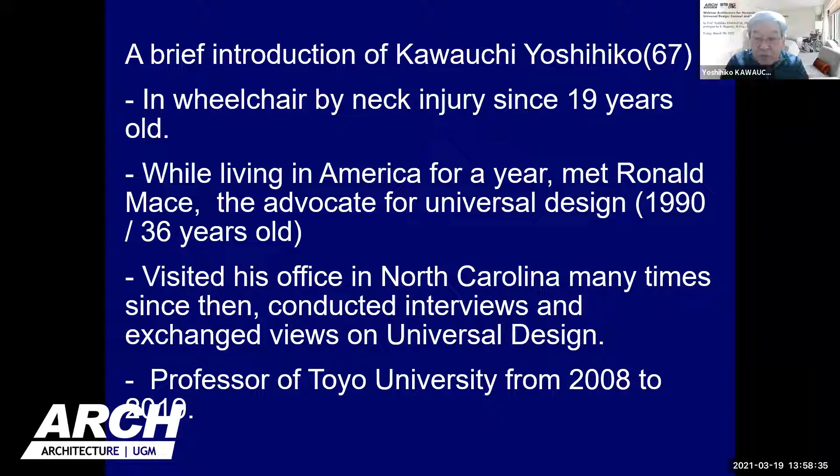And since I'm using a wheelchair, accessibility is very important. But I'd like to ask you why accessibility is important. Let me talk about the stairs. Stairs are not accessible for wheelchair, but if there were no stairs in the buildings, people would have no access to upstairs. That means stairs can divide people into two groups: one is people who can go upstairs, and the other is people who cannot go upstairs.

In that sense, stairs are set to generate discrimination among people. Then next question: everybody says discrimination is bad, but why is discrimination unacceptable?

Because it harms dignity as a human. Accessibility is very important to respect dignity and create an equal society for all. So as a short conclusion, I would like to say accessibility is for dignity. When you design something, please do not forget accessibility is for dignity.

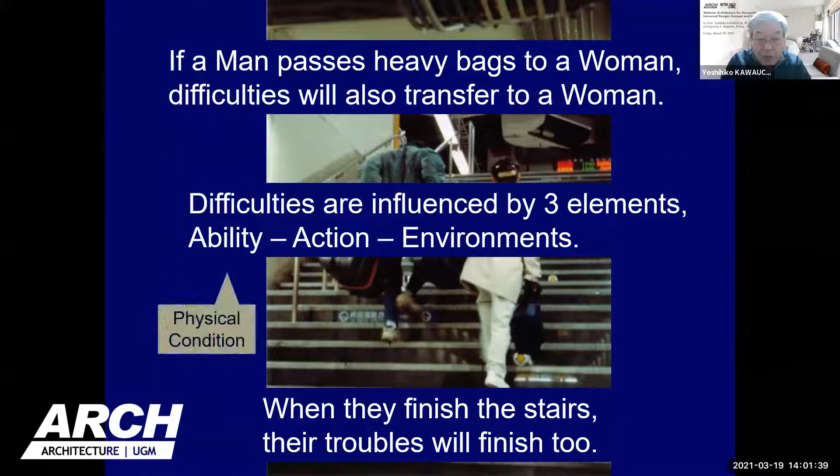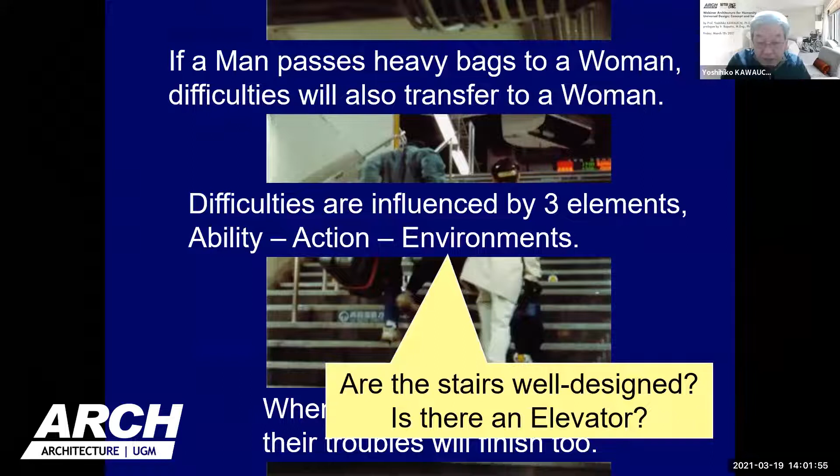So difficulties are influenced by three elements. One is ability: whether or not that person is muscular. Two is action: whether or not they are carrying heavy bags or lightweight bags. Then environment: are the stairs well designed? Is there an elevator?

As a designer, I don't want to say that you shouldn't use this, or that you're not allowed to do that. Therefore, what we can do among the three elements is only one thing: change environments.

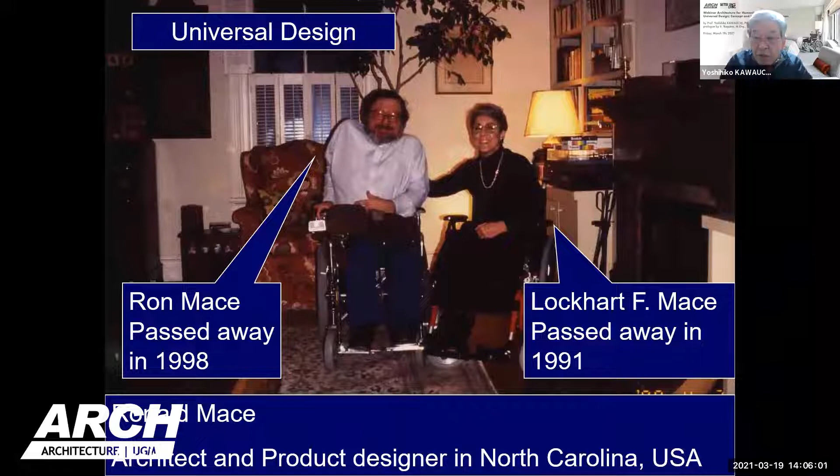This photo was taken in 1990, so at that time I think Lockhart already had cancer in her body. This is a photo from when I first met Ron.

Please watch this transparent tube. Because of the polio, his lung function was very low, so he always needed oxygen. He needed oxygen at any time, so he is pulling a very long, transparent tube. But at that time, he was still able to drive a car.

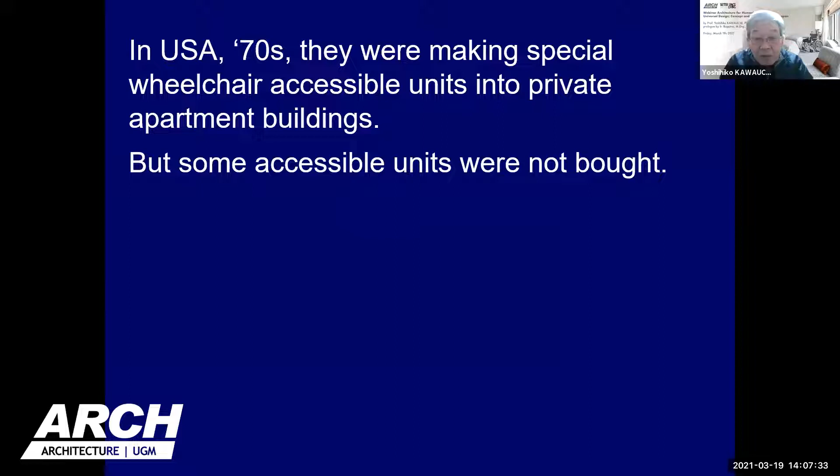In the USA in the 70s, they were making special wheelchair accessible units in private apartment buildings. But some accessible units were not bought. The owners tried to rent them to people who were not using wheelchairs, but they were not popular. People complained that there were no kitchen cabinets.

This was because the owners had removed the kitchen cabinets for the knee space of wheelchairs, and installed grab bars, but other people who have no disability complained it was an obstacle. The apartment owners started to complain: why do we, who have good wills and try to support people with disabilities, need to lose money?

Mace thought that this was because they made special accessible units only for wheelchair users. Many people, including babies and elderly people, are living in apartments together. So he thought it may be possible to design units easy to be used not only by wheelchair users, but also by everybody. He named this idea universal design.

It was mid-70s. And in 1985, he wrote the first article about universal design in the magazine named Designers West. This is a definition of universal design: Universal design is the design of products and environments to be usable by all people, to the greatest extent possible, without the need for adaptation or specialized design.

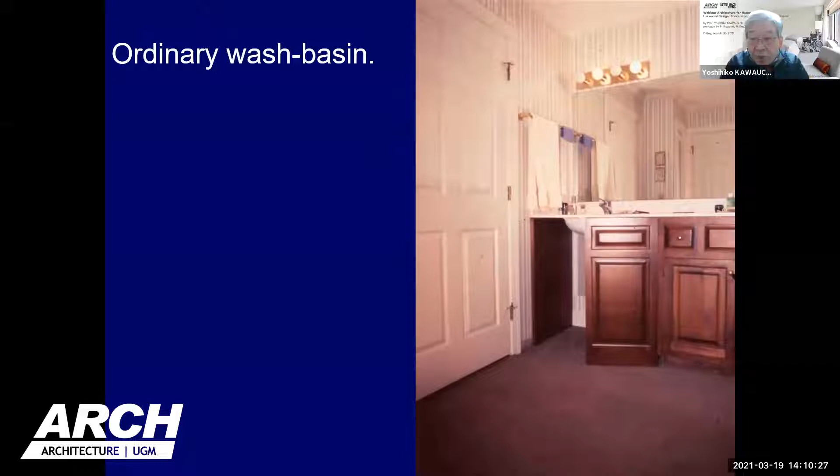This is a wash basin. Some people want to use it in a chair. At that time, if they can open the door of the cabinet, it must be very easy to create a knee space. However, if the door opens widely outside, it disturbs smooth movement of people. So it would be more convenient if the door could be stored.

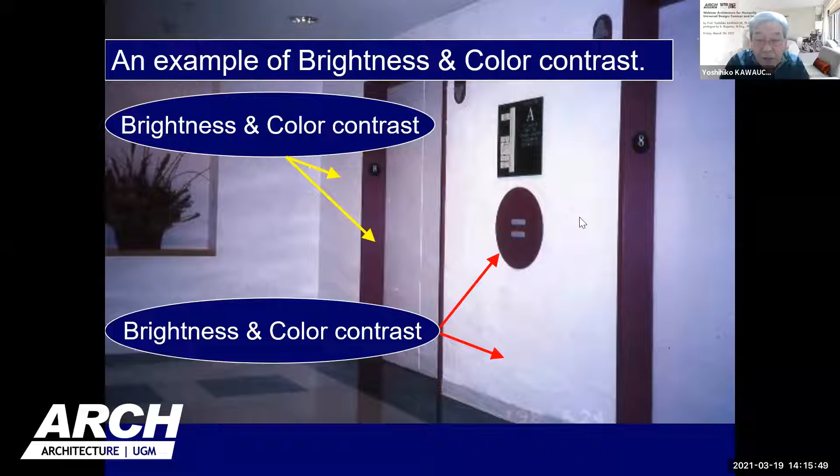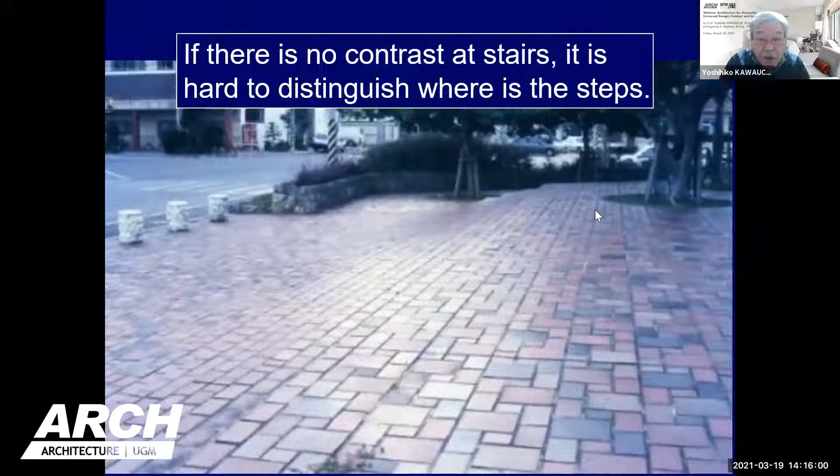This is a photo of the park. Because they made no contrast, it's hard to distinguish where the steps are.

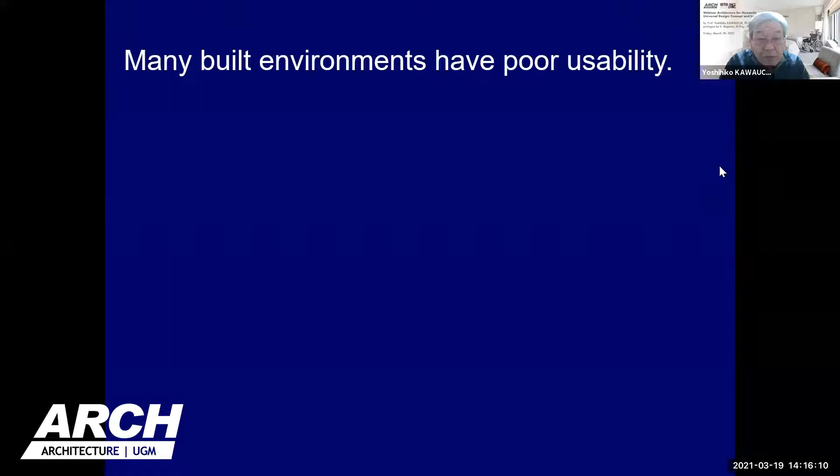Many built environments have poor usability, and unfortunately, many professionals and designers don't know it, so they repeat the same mistakes. We may be able to create a wonderful design if the knowledge and skills of professionals and the experience and wisdom of users are put together.

So therefore, universal design emphasizes user participation. It's not just a matter of people with disabilities having difficulties in the built environment. It will be effective to utilize the experience of various people into design.

Universal design is designed for all, but we need to remember that it is not one design for all. Sometimes it's hard to satisfy various needs with one solution. There is no ultimate one pen in a stationery store.

If you go to a stationery store, you can find various pens displayed on the shelf, and we users can choose one out of various pens in accordance with our needs. So choice is important. How can we provide various appropriate choices to users is critical. After getting choices, users themselves can choose the best one.

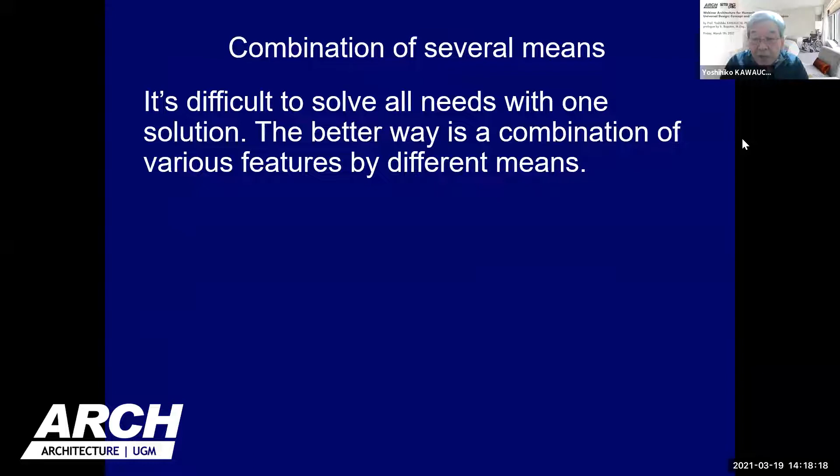When they provide choices to users, the most important thing is that it can be seen at a glance. In order to tell users that you have various choices, those choices should be displayed at a glance.

There is a criticism against universal design: 'for all' is just a dream, it is impossible. Yes, it is true.

For example, some products put into the market at the beginning have low user satisfaction. So the product starts to be improved, and then the satisfaction ratio gets better and better.

However, as users gain various experience, their needs become more severe, so the goal goes higher and higher. So the quality of design gets better and better, getting very close to the goal, but it will never reach the goal. It will never be 100% satisfaction. However, getting close is very important.

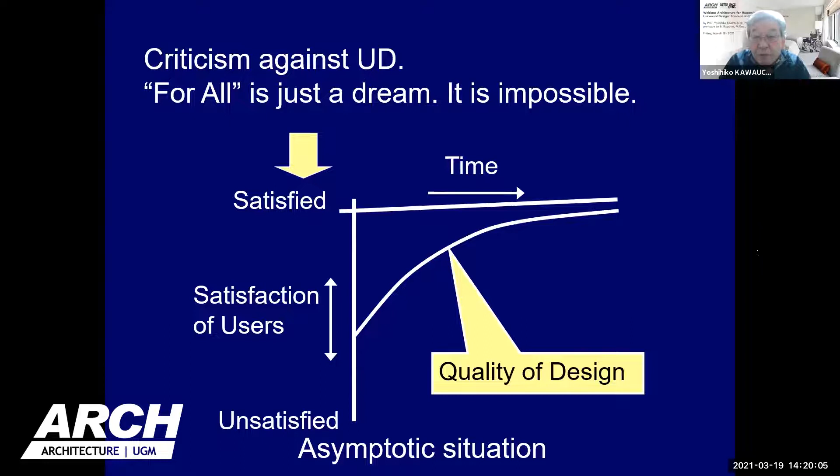So therefore, Ron Mace put a very important phrase into his definition: 'to the greatest extent possible.' Ron knew that 100% is impossible.

However, making the effort to the greatest extent possible is very important. By the way, this photo was taken only one week before his death.

Just one week before his death, we had an international conference in Long Island, New York, and at that time he had no trouble. But one week after, he had passed away.

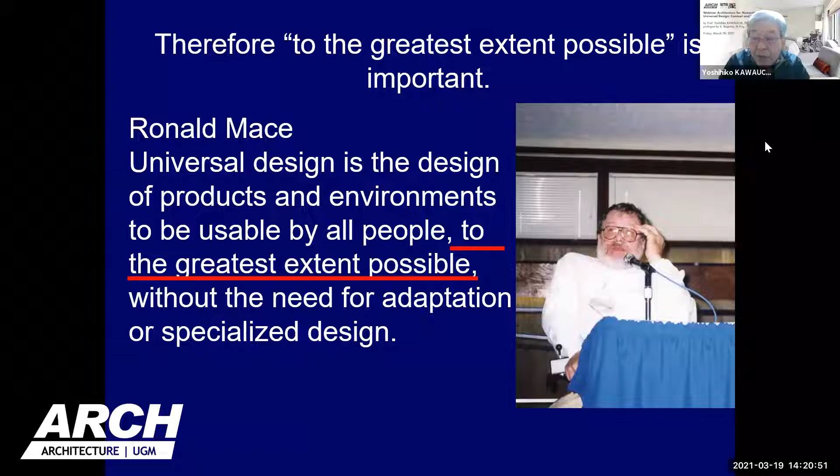In order to reach the goal of being usable by all people to the greatest extent possible, we believe that the spiral up is important.

Spiral up is a concept developed in Japan through continuous improvement. For example, there is some project where various people gather and start to discuss the purpose or goal of this project. Then they will do it.

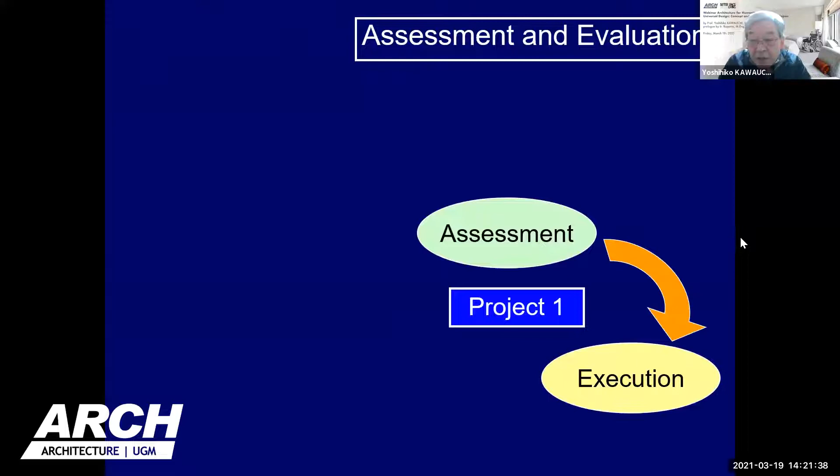Usually, for example, if construction is finished, the project will be finished. However, the important thing about spiral up is post-occupancy evaluation. Then, if they find a problem, they need to improve it.

This circle will happen in project 1. However, after finishing project 1, they will start project 2.

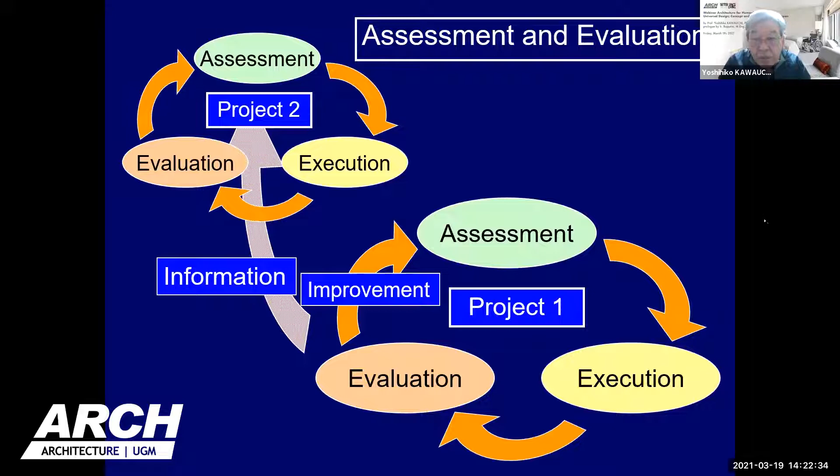At that time, if they can transmit the information of project 1 to project 2, project 2 must be better than project 1. If we can continue those efforts, the design quality of the entire society will be gradually improved.

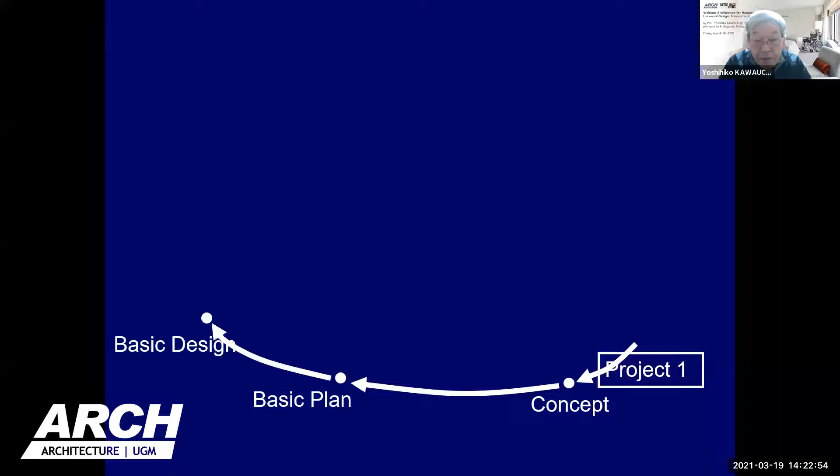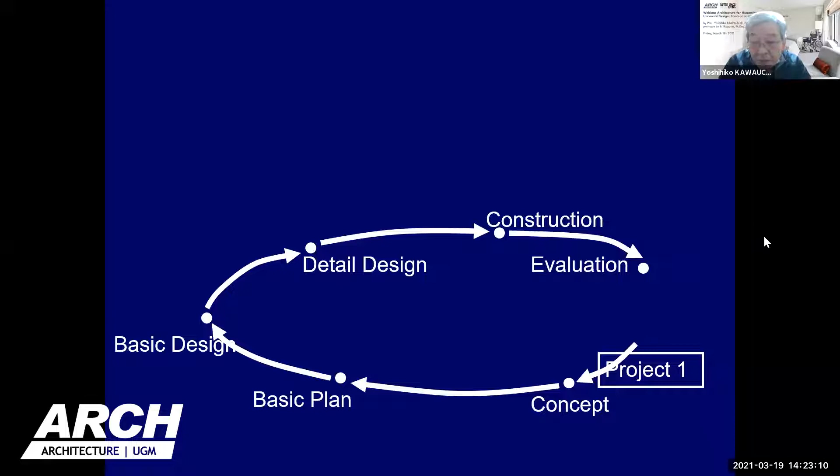Another drawing: project 1. We will start the concept design, then do construction. After that, we need to do a post-occupancy evaluation, and the information we got from this evaluation process should be put into project 2. Then project 2 does the same procedure.

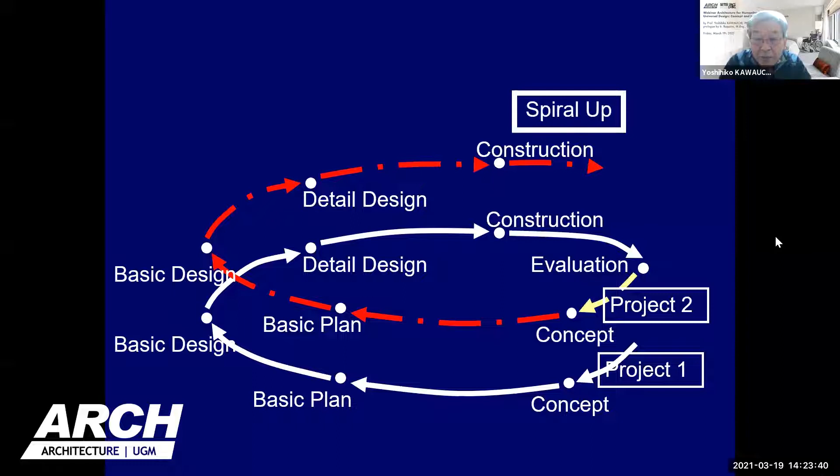Then after finishing project 2, the information gained in project 2 should be put into project 3. If we continue this kind of effort, project 2 will be better than project 1, and project 3 will be better than project 2. This kind of change is called spiral up, and it will make endless and continuous improvement.

I was planning to take a break, but I can continue. Please allow me to continue.

So let me start about the challenges of universal design in Japan. In Japan, the role of government in advancing universal design is very important. Aging is the most serious issue in Japan. They made laws and ordinances regarding universal design, especially the Tokyo 2020 Olympic and Paralympic Games, which have pushed universal design forward.

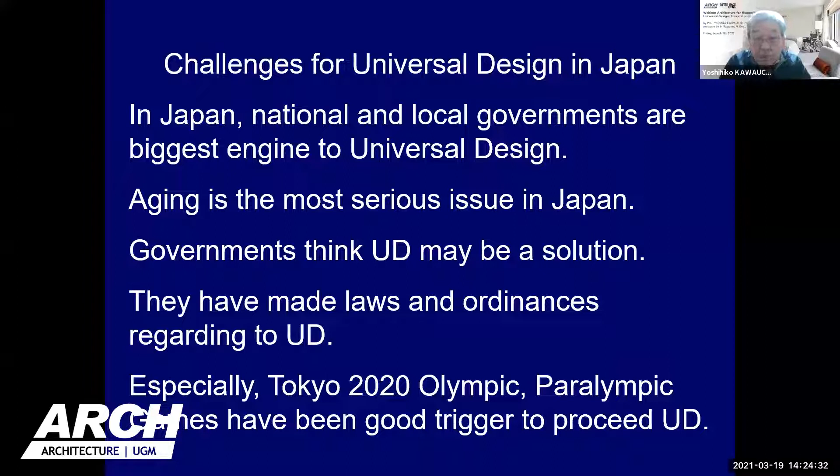Today, I want to explain some examples of airports whose attempts are internationally acclaimed. Skytrax evaluates airports, and this is a list of their evaluations. Skytrax evaluation has very many categories.

This is the World Airport Award, in the PRM and accessible facilities category. PRM stands for passenger with reduced mobility.

The first place is Tokyo Haneda. Second place is Kansai Osaka. Third place is Tokyo Narita. Fourth is Singapore Changi. Next is Incheon Seoul, and sixth place is Centrair Nagoya. Seventh is Hong Kong, eighth is Taiwan, then ninth is Fukuoka. So five airports out of ten international airports are Japanese. That means airport accessibility in Japan is very highly evaluated.

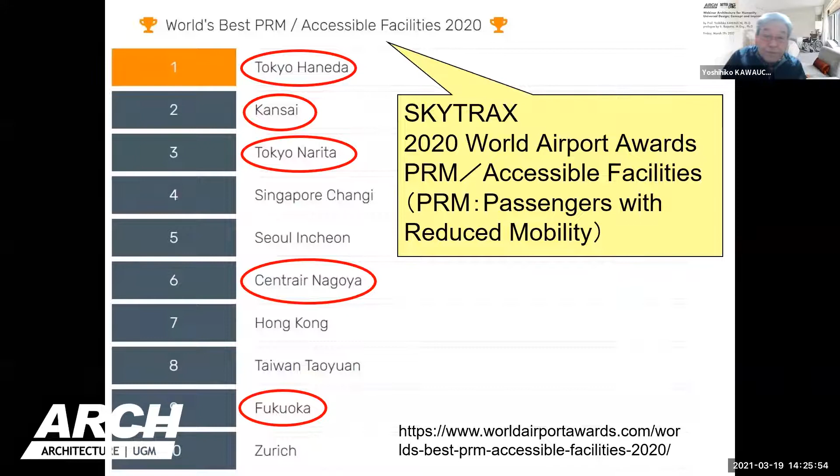But I have a slight complaint about this ranking, because we made Sapporo Airport based on the universal design concept, but it is not included in this list.

However, Tokyo Haneda is also awarded World's Cleanest Airport. Kansai in Osaka is awarded World's Best Airport Staff. And Centrair Nagoya is awarded World's Best Regional Airport.

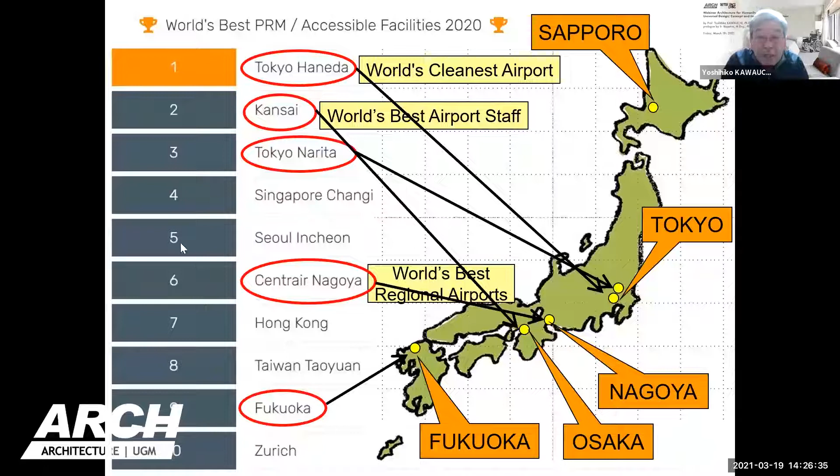The first challenge of airport universal design started at Centrair in Nagoya. Nagoya had an international expo in 2005, so they built a new airport based on the concept of universal design. A very interesting thing is that a non-profit organization by people with disabilities, named AJU, participated in this project as a professional universal design consultant.

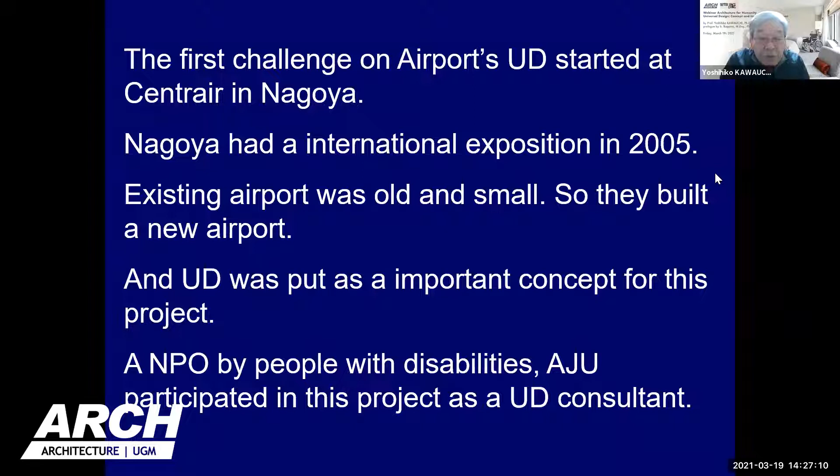In June 2000, AJU formed a universal design study group, and then set up 10 subcommittees for each issue, from 2002 to the opening of the airport in 2005. So these 10 subcommittees worked for 3 years.

These subcommittees had many meetings with users, designers, businesses, and parts manufacturers. They discussed and made mock-ups. These subcommittees had 106 meetings in 3 years.

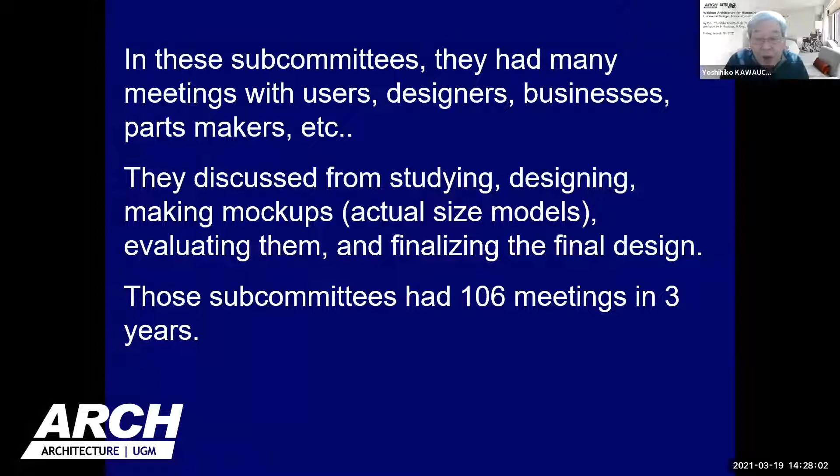This is a plan of the airport. The interesting feature is the so-called access plaza. All passengers come to this airport by train, car, ferry, and of course airplane, gather at this access plaza, and then go to wherever they want. The red arrow is the circulation of people. The left half is international, and the right half is domestic. A very simple plan creates simple circulation.

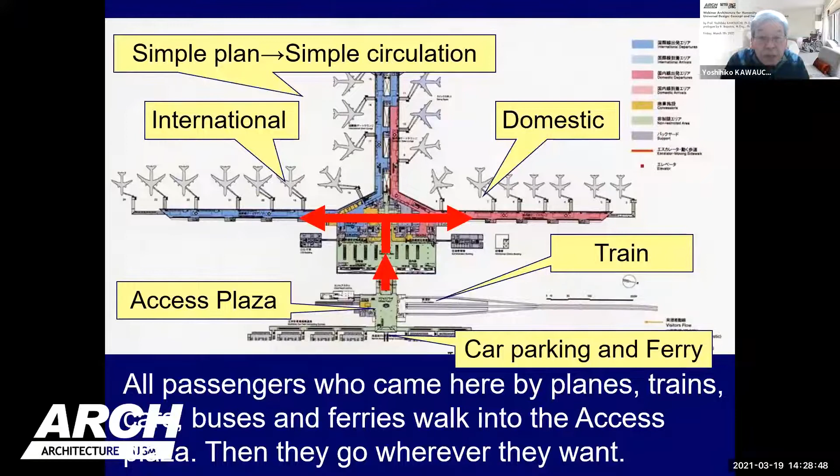The most interesting feature of this airport is the restroom. This is an airport, so many passengers are pushing big baggage and having trouble in small cubicles. Many various things are packed in the bag, so they wanted to carry their bag into the cubicle, but the cubicle is very small, so it's impossible. Therefore, we decided to make each cubicle bigger, and that is also available for users of small wheelchairs or people with baby strollers.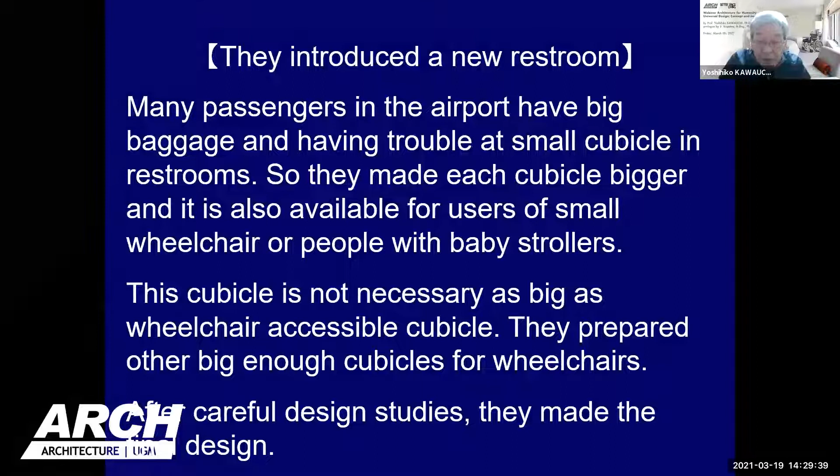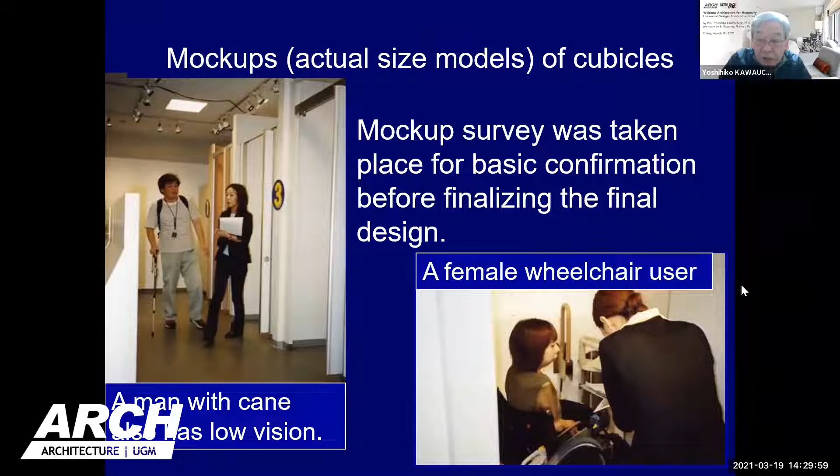We made a mock-up and checked it. We invited various people and heard their needs, and decided the detail of the design. It looks like a real toilet, but this is also a mock-up, just a model. We invited various people and asked them to check it. This is a drawing used for the mock-up.

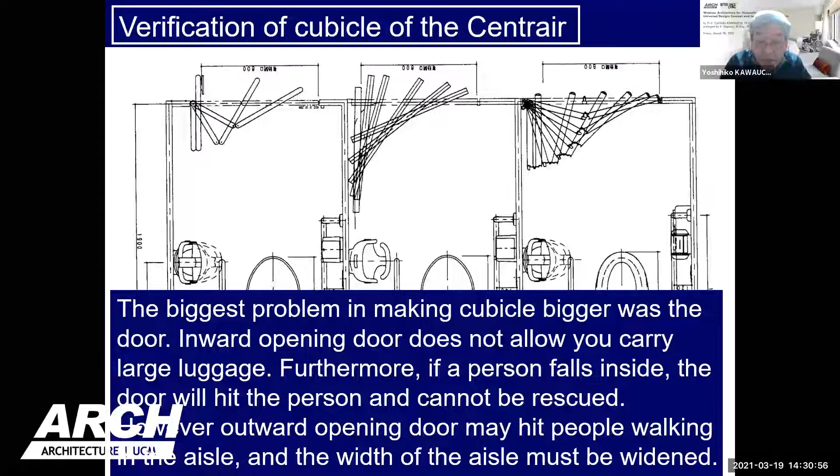We were very anxious about the door, because if the door opens inward, it does not allow you to carry large baggage. Furthermore, if a person falls inside, the door will hit the person and they cannot be rescued. However, if the door opens outside, it will hit people walking outside, and we would need to widen the width of the door or the aisle. So we considered folding doors and other specially devised ones that open outside but do not protrude too much on the aisle side. Therefore, we thought of a folding door or special function door.

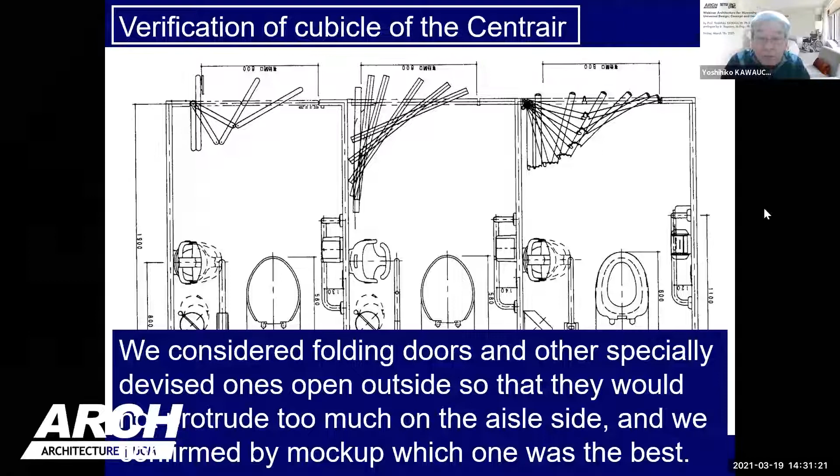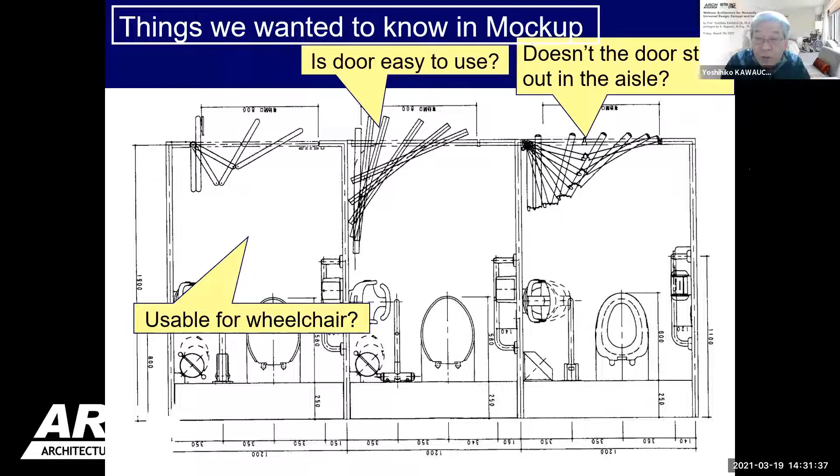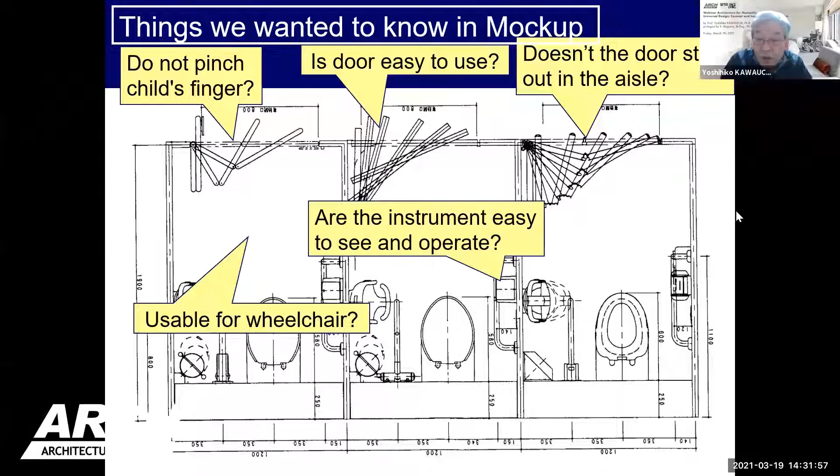So we wanted to know whether or not the space is usable for a wheelchair, whether this new door is easy to use, and whether this door does not stick out in the aisle. And because this is a folding door, we were very anxious about whether this door could pinch a child's finger. Also, our biggest concern was whether visually impaired people know the position of the key.

People with visual impairment often act on the basis of their experience. The key to the toilet door is usually near the edge of the door, on the striking side, so they look for it there, expecting it should be there. However, in many folding doors, the key is at the center of the door, so they cannot find it if they pay attention to the edge.

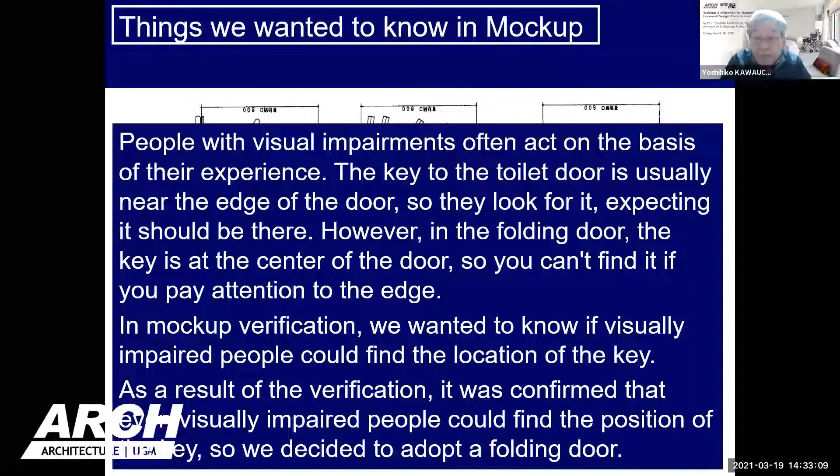In the mock-up verification, we wanted to know if visually impaired people could find the location of the key. As a result of the verification, it was confirmed that even visually impaired people could find the position of the key, so we decided to adopt a folding door. Then we installed an L-shaped handrail on the wall side, and on the other side we installed a flip-up handrail.

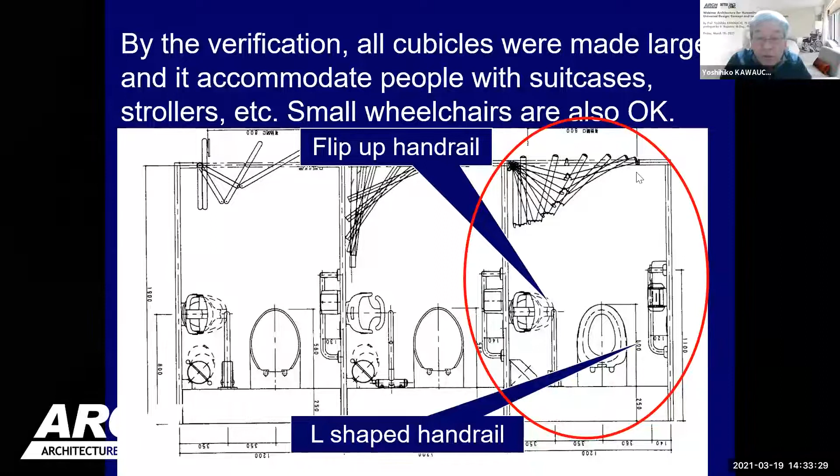Because this is a folding door, it can accept people with big suitcases, strollers, baby strollers, and of course, a wheelchair is also usable in this cubicle.

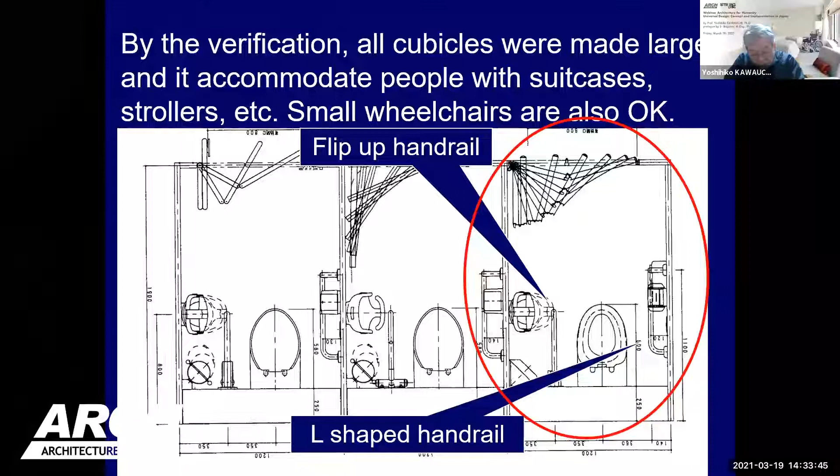This is a plan of the regular toilet. We installed a powder corner. Powder corner is usually installed in the ladies' room for them to fix their makeup. This is a reconstruction place for their makeup.

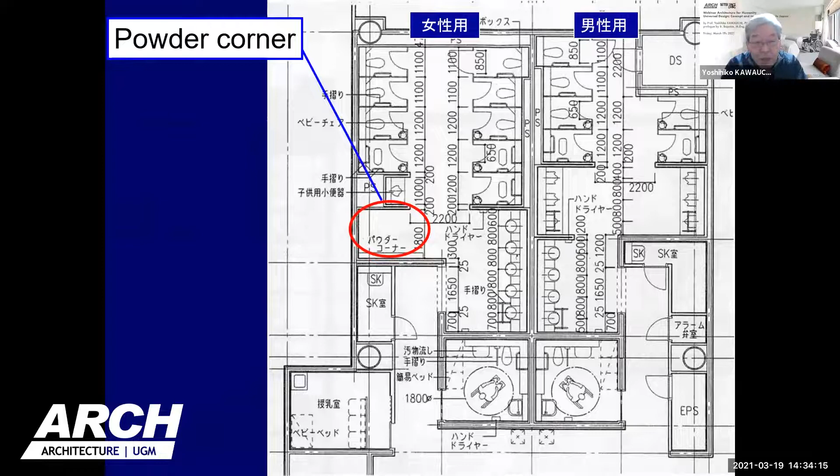Usually the wheelchair accessible cubicle is provided for left-handed and right-handed use. And we also made a nursing room for breastfeeding babies and changing diapers.

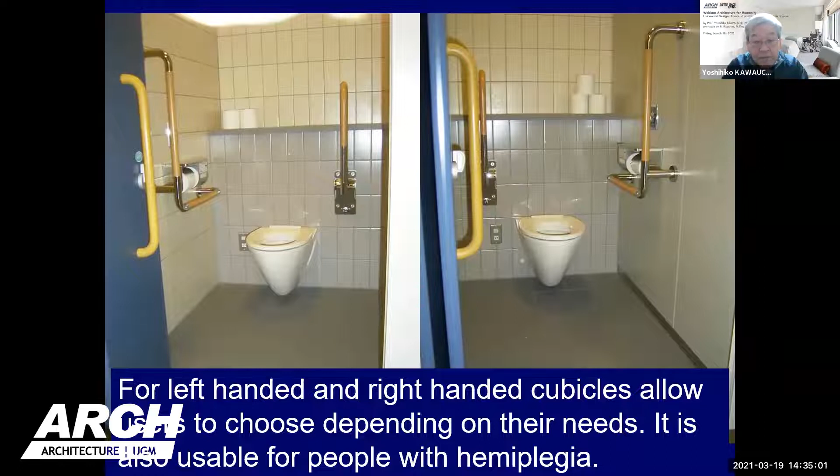Those are photos of each cubicle. Each cubicle is big enough to carry big baggage into, and this is designed for left-handed and right-handed use. It allows the user to choose depending on their needs, and it is also usable for people with hemiplegia. All cubicles use folding doors, and all cubicles are large.

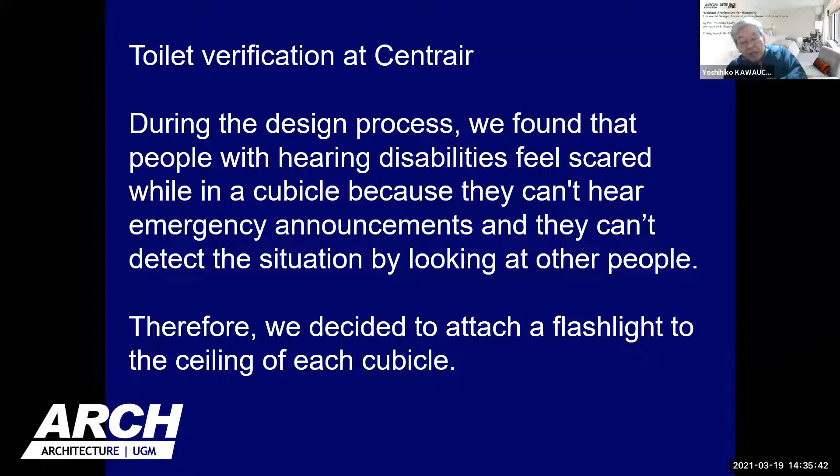During the toilet verification, we found that people with hearing disabilities feel scared while in a cubicle because they cannot hear emergency announcements and cannot detect the situation by looking at other people, because they are in a box. Therefore, we decided to attach a flashlight to the ceiling of each cubicle.

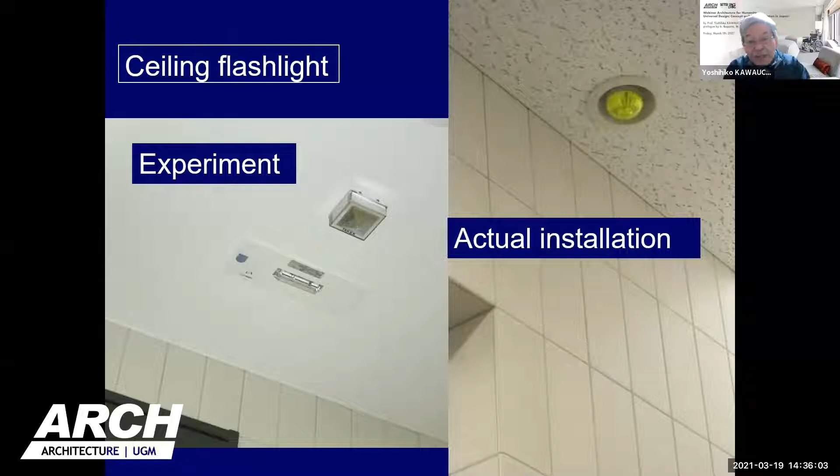This is a photo of the experiment. Finally, we installed this flashlight. Usually it does not light, but in an emergency situation it flashes. We chose a color that passes well through smoke.

Some cubicles have children's toilet seats and signs on the doors.

Also, the shape of the key was difficult to decide, when considering whether various products can be used without using fingers. Sometimes a toilet key requires enough finger function, but some users cannot use their fingers. So in order to understand whether this design is usable for people who cannot use their fingers, it can be roughly understood by looking at whether it can be used with a hand shape of rock or paper - meaning a fist or an open hand with fingers extended.

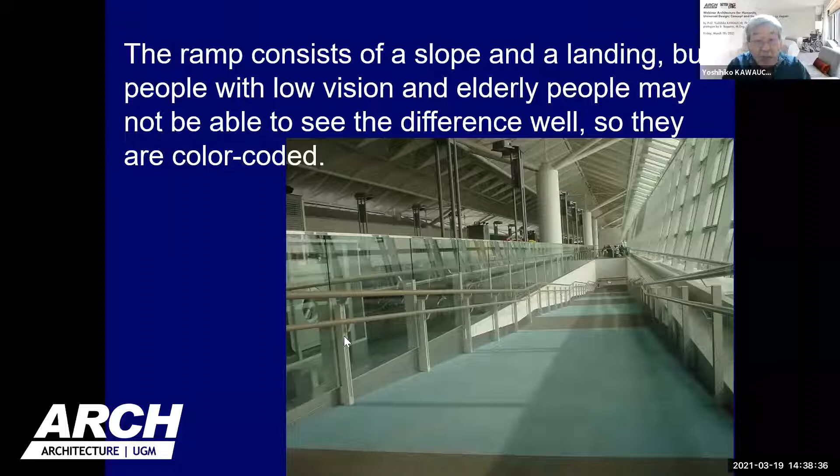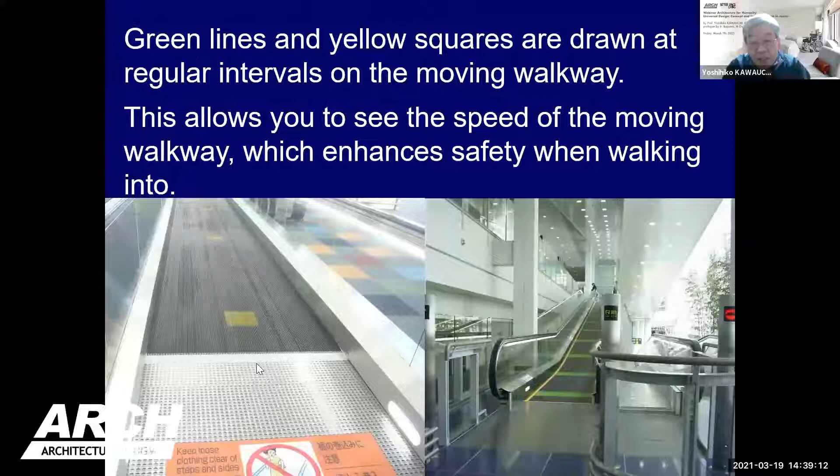And also, we use the concept of affordances actively. This black line on the floor and the light line on the ceiling teaches the expanse of space and the direction of walking to passengers.

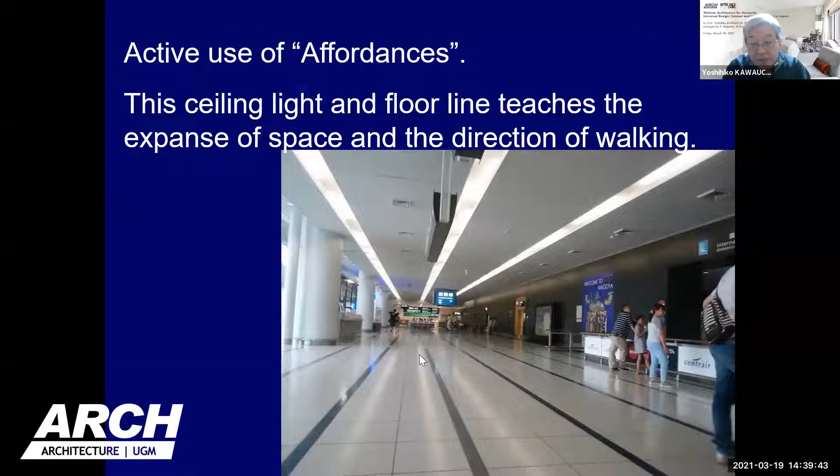Then those lines are broken in some places. This broken place tells passengers this is a place to change direction. In this photo, in the red circle, this is a place to turn right from the arrival lobby toward the access plaza. They also put a hanging sign from the ceiling.

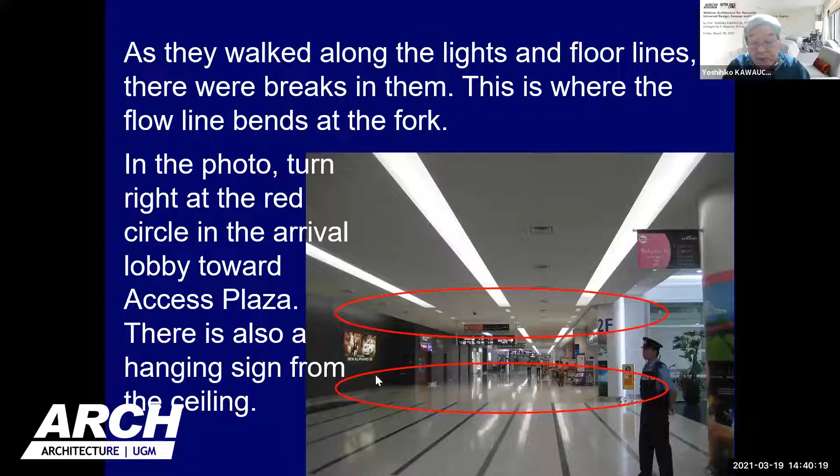This airport is called Centrair. Designers, equipment manufacturers, and users got together and discussed many things for 3 years. Due to the participation of the group of persons with disabilities, AJU, as a consultant, many persons with disabilities - physical, hearing, visual, and intellectual - were invited into this discussion.

However, on the other hand, people with mental disorders and elderly people did not participate in the subcommittee. In that sense, post-occupancy evaluation by various parties is desired, but it has not been carried out. So let me explain the next example.

Haneda International Airport Terminal opened in 2010. Remember, Centrair Nagoya opened in 2005, so we were able to apply its experience to Haneda Airport. Haneda Airport is actually a very big airport, and 2 buildings have already been built for domestic purposes, and this 3rd building is a new construction for international purposes.

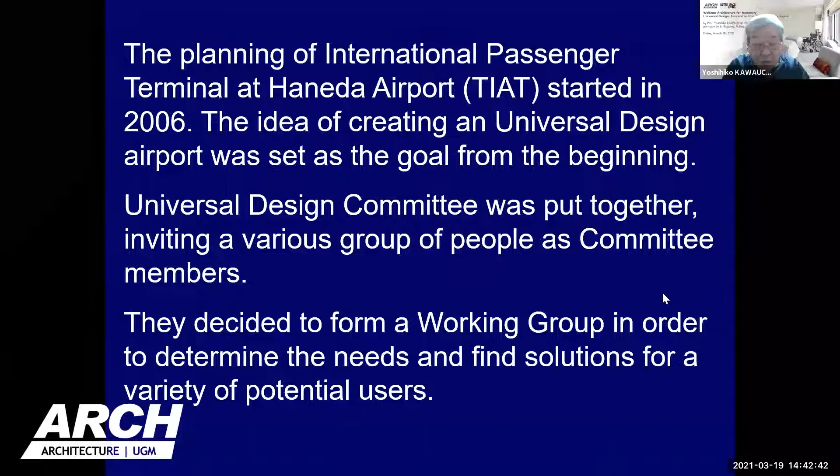The company operating this airport is called TIAT. The plan started in 2006, and the Universal Design Committee was established, inviting various groups of people as committee members. They formed a working group in order to determine the needs and find solutions for a variety of potential users, forming 3 different workshops: mobility group, visual group, and hearing group.

Of course, a variety of people are not covered by those 3 groups, so we had hearing sessions with various people. 10 committee sessions and 38 workshop group sessions were held over 4 years. From the beginning, we needed to know the needs of other people.

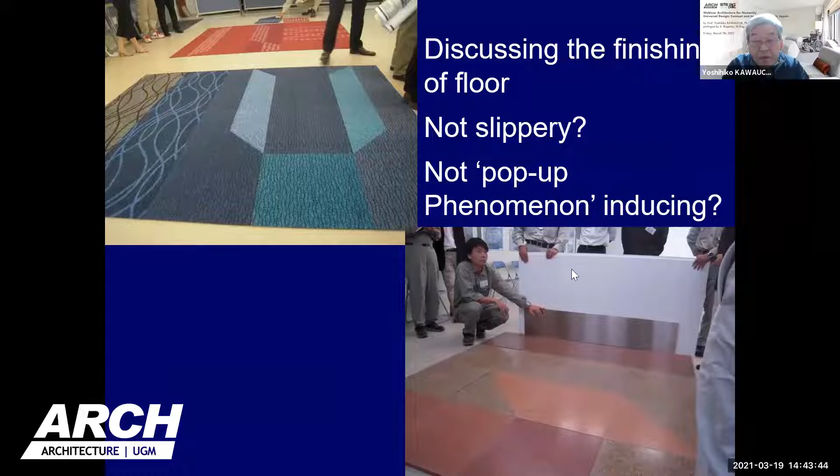Understanding each other is very important to make this project successful. This is a check of the floor pattern. We are very concerned about pop-up phenomena. If the floor is too dark, some people, especially low vision people and those with developmental disability, feel this dark place is like a hole. And if the floor is too bright, those people feel this part will be raised. So if the pattern is not appropriate, some people feel the floor is dangerous and uneven. In order to prevent this kind of phenomenon, we carefully checked the pattern of the floor.

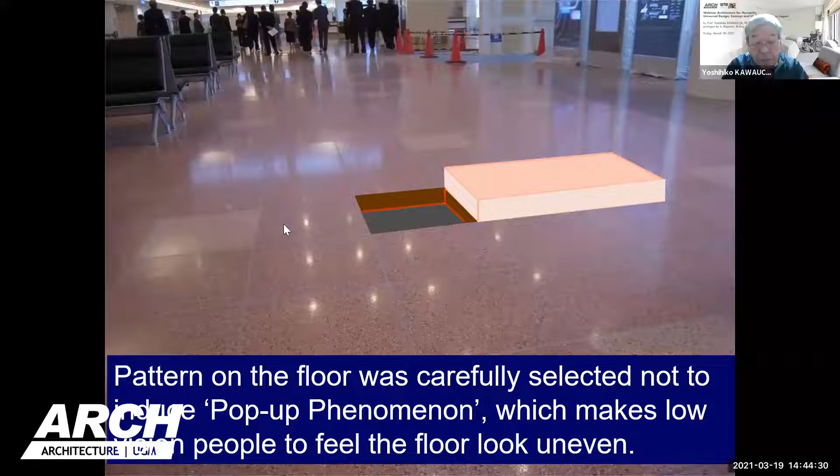We have developed a communication support board. Although it's called a board, it's just paper with a lot of icons printed on it. At the beginning, we developed this paper for people with hearing disability, developmental disability, or intellectual disabilities who cannot speak, but who can communicate by pointing at those icons. After opening the airport, we found this is also very popular with foreigners who cannot speak Japanese or English.

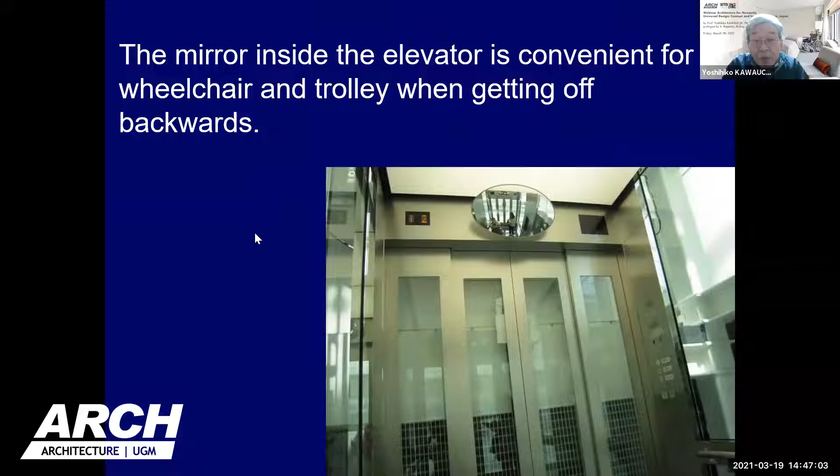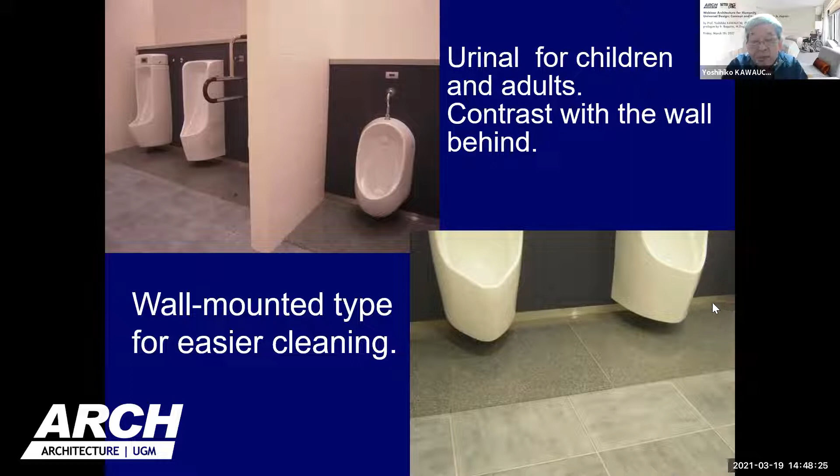Also, the biggest feature of this airport is the concierge. Of course, we have made the building accessible for everybody; however, something is still not enough. At that time, the concierge will help with the user's special needs. Every concierge can speak more than two languages, and all of them have received training to accommodate various people.

Also, another feature of this airport is the post-occupancy evaluation. This project itself was made by the national government, but practical operation is done by a private company. So the contract between government and private company says post-occupancy evaluation should take place once every 2 years for 30 years. The outcomes are classified into short, mid, and long-term issues, and improvement plans are set and announced on the website.

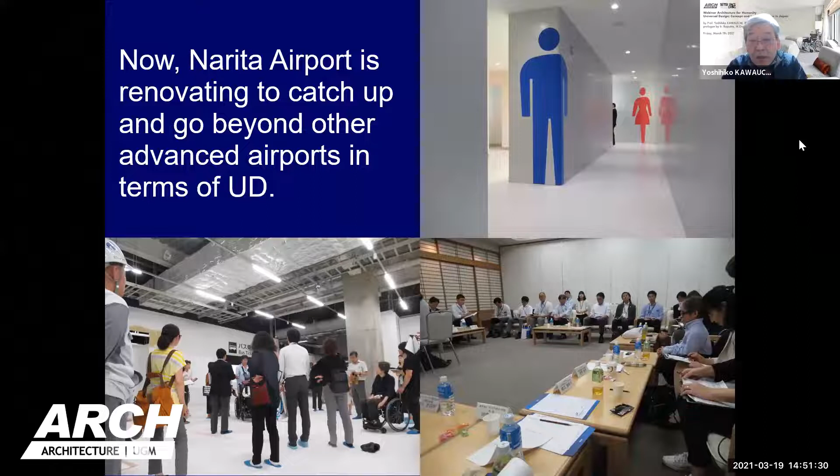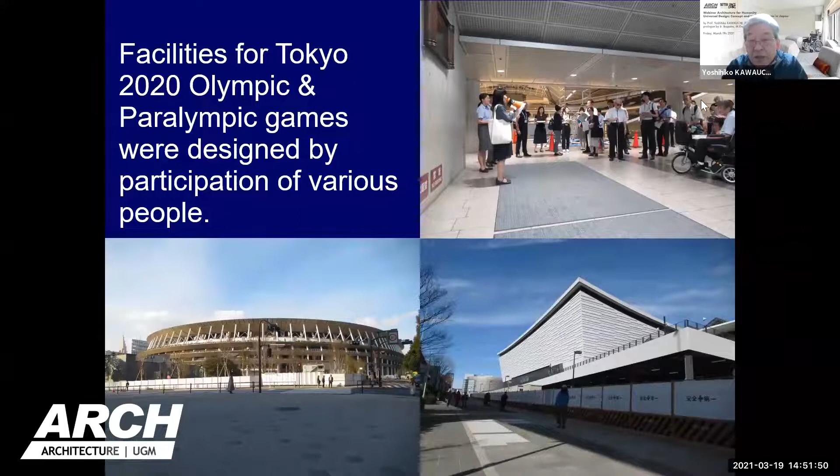Also, facilities for the Tokyo 2020 Olympic and Paralympic Games were designed with participation from various people. They set up an accessibility workshop, and various people were invited as committee members to work on the details of the design.